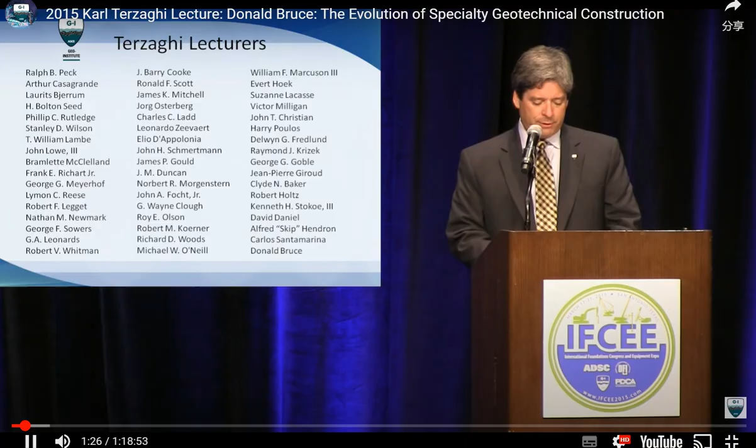I'm proud to be the one to introduce this year's Terzaghi lecturer, Dr. Donald Bruce. Dr. Bruce has spent his career in the practice of geotechnical engineering and construction, and has produced significant contributions to the profession that have helped advance our industry. I can think of no better forum for this speaker or this topic than here at IFCEE, where we have such a cross-section of the geotechnical engineering and construction community. Dr. Bruce's leadership in technologies such as anchors, micropiles, grouting, deep mixing methods, and diaphragm walls has shaped the way geotechnical engineers solve practical problems.

He completed his formal education at Aberdeen University and then spent about a decade with Colcrete Limited, rising to a seat on their main board. In 1986, he joined Nicholson Construction in Pittsburgh, Pennsylvania, as their technical director. Since the late 90s, he has maintained a technical consultancy, Geosystems LP, supporting consultants and contractors around the world. Throughout this time, he has been actively engaged in numerous professional and trade organizations and code writing bodies. In fact, he may be one of the most prolific practitioner writers in our industry. With nearly 300 publications to his credit, he has shared his experience throughout his career.

He was recognized with the Martin S. Kapp Award and the Wallace Hayward Baker Award. And I think it is safe to say that without his efforts to expand our understanding of many geotechnical construction technologies, our industry would look very different. I'm happy to say that Dr. Bruce has been one of my mentors for many years, helping me navigate many technical and some not so technical challenges of my profession, or of the profession. So without further delay, Dr. Bruce, would you join me up here at the podium?

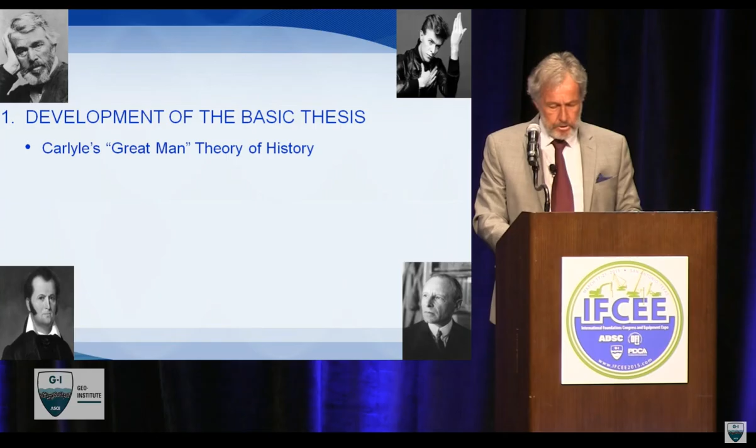There's a wonderful continuity in this little argument I'm going to present here. Professor Dick Goodman, who many of you know, is widely regarded as the father of modern rock mechanics. He remains a gifted engineer and a thespian. Arguably, his finest and most enduring work is his 1998 book, Karl Terzaghi, The Engineer as Artist. Professor Goodman dedicated this book, in turn, to Ralph Peck, whom he called a courageous, strong, honest human being whose teaching, writing, speaking, and practice of civil engineering continue to light the way.

Dr. Peck, in turn, is quoted in the book as follows: "Although I knew Terzaghi well, because he'd worked for and with him for almost 30 years, I did not fully appreciate the personal struggles of the genius of the man until I read Goodman's manuscript. Goodman has caught the essence of the man." Dr. Peck gave the first Terzaghi lecture in 1963.

Terzaghi, Goodman, Peck, not to mention others of such status, such as Arthur Casagrande and Mike Duncan, the Terzaghi Award winner 1991. These are great men in geotechnical history, bringing enlightenment, inspiration, and example to all of us that they touched.

Now, each of these men, as you probably know, spent as much time in the field as they did in the classroom. And each was intimately acquainted with construction, means, methods, and materials. They solved in a practical way otherwise intractable construction problems and had the gift of communicating simply and clearly the logic and details of their solutions. None of these men, nevertheless, was a contractor. I guess everybody cannot be perfect.

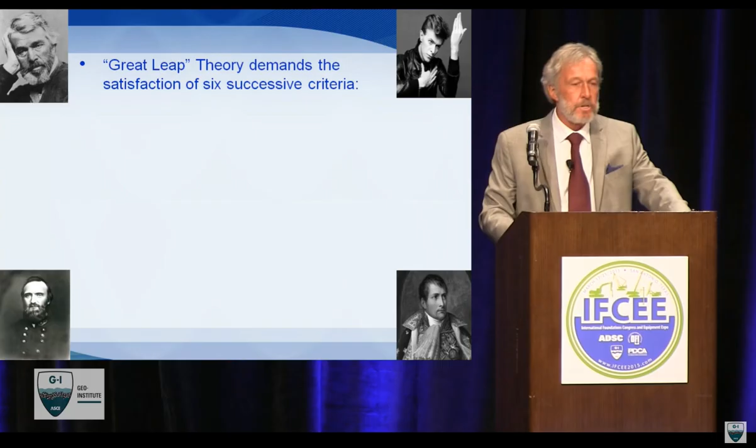So, to constitute a great leap, I propose that 6 successive criteria need to be satisfied. Please try and remember these as we go through the rest of the afternoon, because each of the 3 techniques I'm going to talk about will demonstrate how great leap theory is satisfied by looking at each of these successive steps.

Criterion 1: the project, group of projects, or application must be of exceptional and/or unprecedented scope, complexity, and construction risk.

Criterion 2: a specialty contractor must exist who has the ingenuity and resources to devise the solution, and there must be a manufacturer that he can work with that can provide the equipment needed to implement the solution.

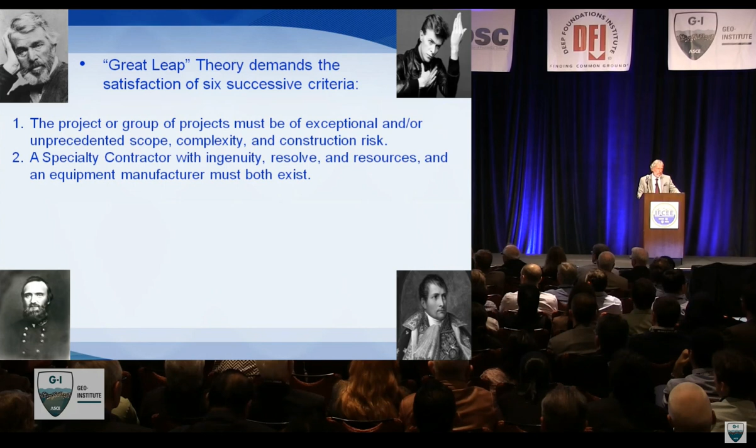Number 3, on the other side: there must be a responsible individual and/or agency on the project owner's side who is prepared to take the perceived risk of deploying a new technology or technique, and who already knows the answer to the question, so where has this been used before? There's got to be somebody on the engineer's or owner's side that is willing to take that risk.

Criterion 4: the projects we talk about have got to be successful. This is clear. We cannot have a recurrence of the situation where the operation was a great success but the patient died. So it has to be a good job or series of jobs.

Number 5, to qualify for the Great Leap: details of this project must have been published widely in the scientific technical press, and not just or only as wonderful articles in the trade magazines, no matter how beautiful and informative these may be.

And then number 6: within a few years, there must be some formal codification or other influence over construction processes to assure the legacy of the Great Leap and to guide and tutor future exploitations, the dubious defense of patents notwithstanding. In our field, such recognition typically comes through the publications of a federal agency, such as the U.S. Army Corps of Engineers, Bureau of Reclamation, Federal Highways, and so on; a professional society such as the Geo Institute; or the efforts of trade associations such as DFI, ADSC, or PTI.

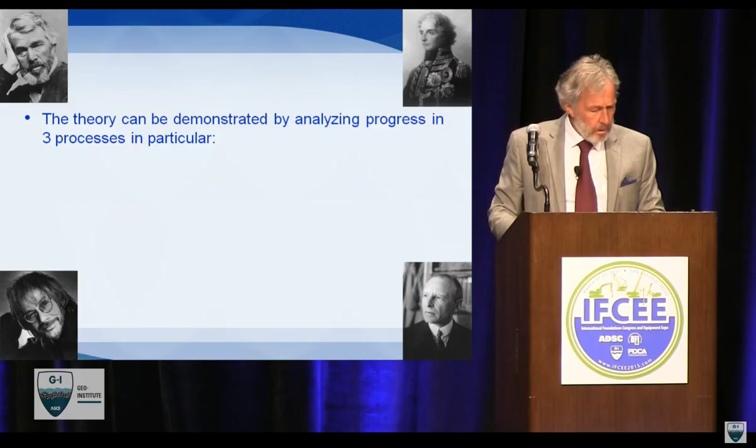So the 3 that I intend to talk about, and those of you who know me will not be surprised: grout curtains in rock for big dams, cut-off walls for dams, and deep mixing methods.

Again, I apologize that your own particular favorite subject has not been covered, but I would encourage you, if you are moved, why don't you write a similar paper about the great leaps that have influenced your particular technology as well. Now, I have to come with a government health warning here.

In the course of the next half hour or so, I'm going to be mentioning a lot of companies, contractors and consultants especially, with whom I have worked over the years and who are integral to the Great Leap theory, i.e. Criterion 2. So I'm not trying to promote them or endorse them or say that they're the biggest and the best. I'm simply making a historical statement of fact. So please don't not buy me a drink in the bar later if I don't mention your company.

Okay, so with that in mind, then we go to the fun part of the lecture. This is where we're just going to make it up as we go along. And I have my board in front of me, so I don't have to turn sideways. At a time like this, especially before dinner at the beginning of a conference like this, I don't think it's satisfactory that you just be educated. I think it's important that you be entertained as well. So those of you who have come here with your notebooks ready for fourth order differential equations will be sadly disappointed. Those of you who would really like to see, thank you very much for that.

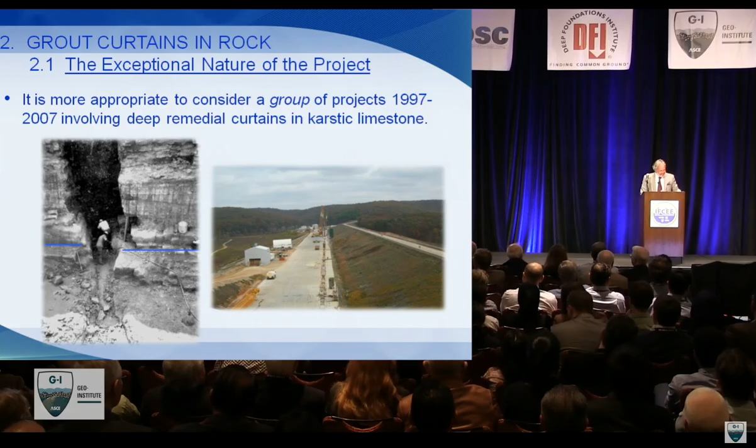Right with you, brother. And those of you who are here maybe to look at some cool bits of equipment, nice jobs, some of which you may have been involved with, that's the kind of talk we're going to have for the next half hour or so.

So, grout curtains in rock. Remember, we have six criteria that define the Great Leap, and the first is that the project's got to be exceptional. There was a group of projects that kick-started the Great Leap in curtains in rock, from 1997 through to 2007, involving deep remedial curtains in karstic limestone.

Now, for those who haven't had the pleasure of working in karstic limestone, a few words. Limestone has joints in it. Over the years, these joints erode and create caves. Karst is a word in German associated with cave.

Many of our dams in and around the Mississippi Valley sit on karstic limestone. Most of the big karstic features, shown on the left-hand side here, are clay-filled. Over time, as the reservoir works on these features, if they haven't been previously treated, this material will erode and cause a dam safety incident. And we're not just talking about wee dams or little dams.

We're talking about gigantic, big dams. That's why we're the conference on large dams, not a conference on little dams. We have dams that are hundreds of feet high and thousands of feet long.

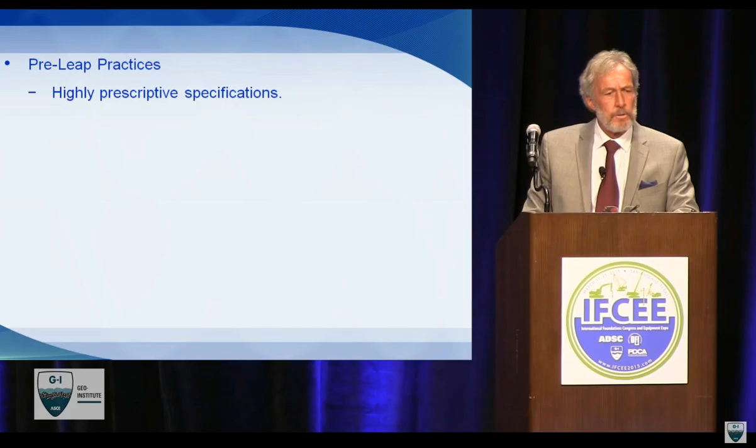So in drilling and grouting, the pre-leap practices would have been the state of affairs from maybe 1900 through to about 1985. Very prescriptive specifications, a complete absence of rational design and acceptance processes, and a widespread use of rules of thumb for design and execution. From a technical point of view, these were the features that marked the kind of work done until quite recently.

And all of these, incidentally, are bad things, okay? So even if you don't know about drilling and grouting, just assume that this is just not good news at all. Especially the last one.

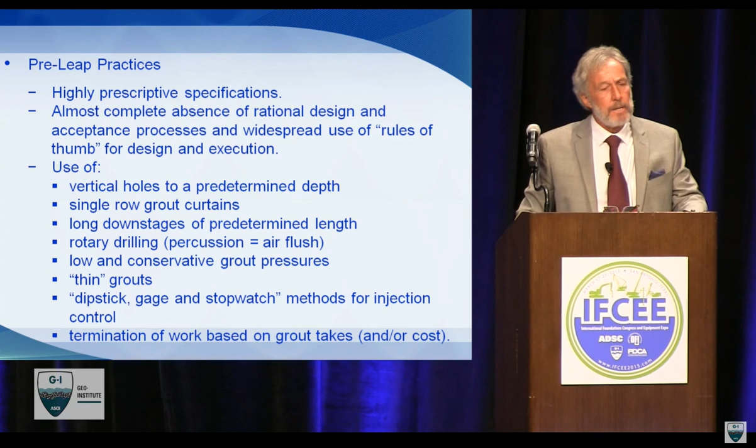Many of our dams that we work on, for example in the Tennessee Valley Authority back in the day, were unsuccessful because they were grouted not to a residual Lugeon value, but to a residual dollar value. So basically you stopped when the money ran out. And when you grout in karst, you've really got to know what you're doing.

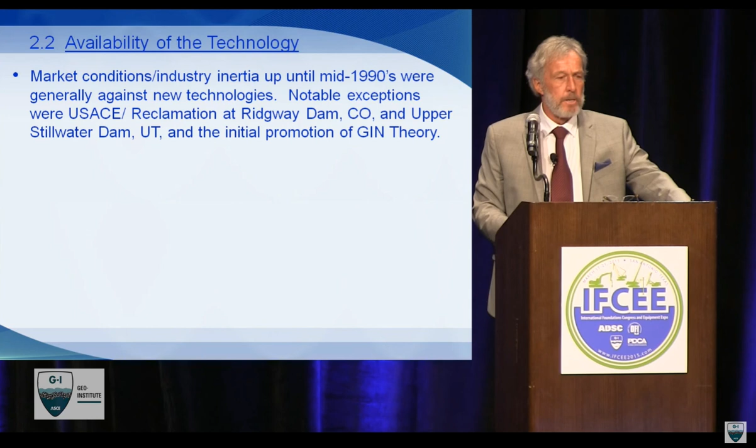Back in the day, there was the initial promotion of GIN theory by Lombardi and Professor Deere. Not much happening. Then the leap occurred.

This is where we have our first confirmation that there's a technology available to solve these problems. It was basically an association of a contractor, Advanced, and a consultant, Gannett Fleming. They got it together and introduced simultaneously numerous technical developments as an integrated package, from the design side right through to the implementation side.

I think, quite frankly, they hit the sweet spot in the market, because the Corps especially was moving towards best value as opposed to low bid contracting, and more performance-based specifications, therefore more ability for the contractor to actually give what was in his mind, not just his arms and legs. He was able to bring his head to the game as well. You can only do that if you have performance-based specifications.

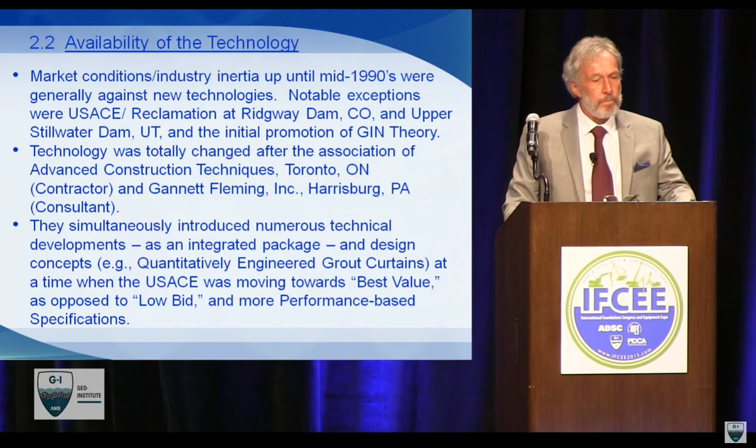So all these improvements come along. Design improvements: there's no such thing, folks, as a one-row grout curtain. It's an absolute fallacy, like the check is in the mail. Inclined holes, not vertical holes. The depth of the curtain being dictated by the geology, not by a rule of thumb, and various other things as well.

And then once we had built the curtain, verifying the residual permeability of the curtain by doing in situ water tests. So instead of grouting to the dollar or the sack of cement, we're grouting to the Lugeon value, or the centimeter per second.

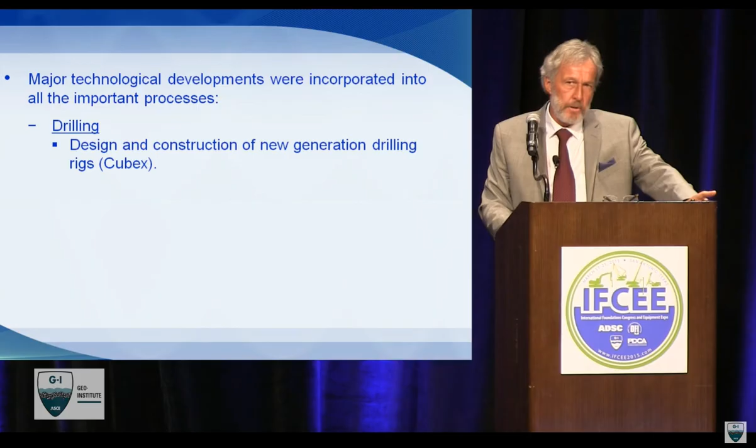So that's on the design side, that's what the Gannett Fleming team brought. Advanced, what did they do? On the drilling side, they commissioned and had built for them a new generation of drilling rigs specifically targeted for the deep grout curtain market, the Cubex company from Winnipeg in Canada.

At the same time, we were looking at ways to drill through our existing dams without causing damage. So we had the sonic drilling first proposed by ProSonic and Boart Longyear, and then the double head dry duplex system for overburden drilling as developed by Advanced themselves.

Increasingly, from McCook Reservoir in 2003 onwards, the water-powered down-the-hole hammer, produced by Wassara from Sweden. This is absolutely the bee's knees in terms of rock drilling, combining rotary percussion, i.e. speed, and water for flush and cleanliness of the fissures. We don't drill with air when we're trying to grout fissures.

And then, of course, the routine use of automated MWD, measurement while drilling techniques, such as offered by Jean Lutz and many others. Other companies, such as Bauer and so on, have their own drilling performance measurement technique, but fundamentally Lutz came with the first one, and others followed and improved upon it.

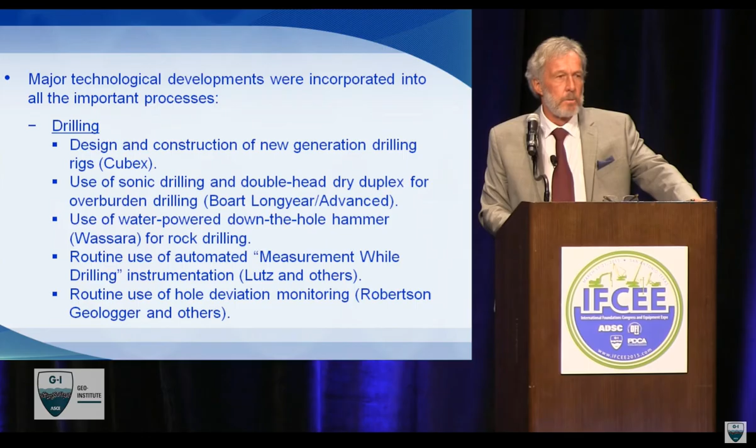And then we have another really interesting thing that's happened over the years: the systematic use of borehole deviation monitoring, specifically using the Robertson geologger and other devices as well. It's really quite important to know where these holes really are 400 feet down.

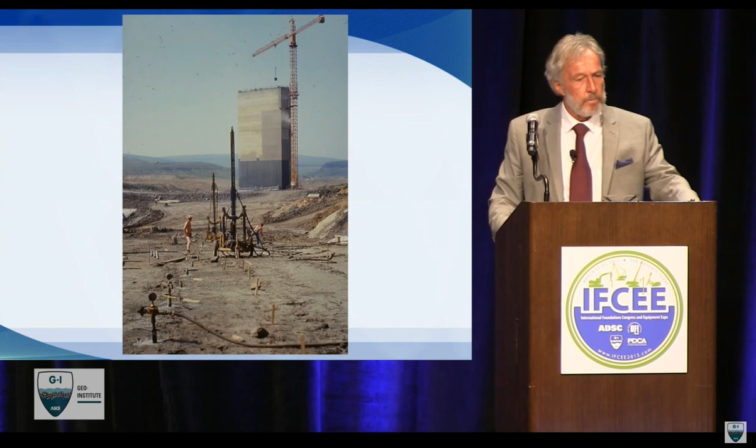Then, of course, there were other staggering breakthroughs in drilling technology. I was really trying to get a photograph of the guy in green underpants since it's St. Patrick's Day, but unfortunately we'll just have to do with the blue. But he's got his hard hat on, so this is good. And then for those of you who are really into health and safety, this is rather good. Here we have this gentleman at Tarbela Dam sitting on top of the drill head, helping to unscrew the rods as we're changing. So yeah, it's funny, but it's not to be done.

So here's then what we do now. This is a photograph of one of the Cubex rigs that was used by Advanced and Gannett Fleming at Wolf Creek. Many of the other contractors in the room, Baker and Nicholson and so on, have these wonderful machines now, and they really have set the standard.

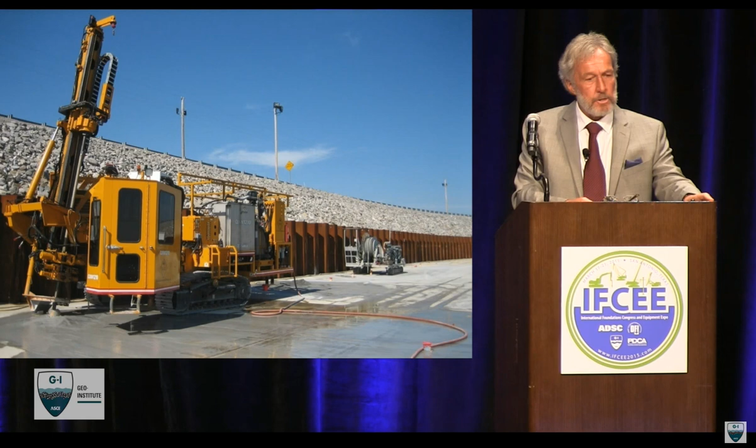Climate-controlled, automatic drill rig parameters, automatic rod handling and changing facilities, tremendously adept, huge productivity improvements over the last. And here's our friend Mark, looking at the business end of the double head dry duplex system at Clearwater Dam.

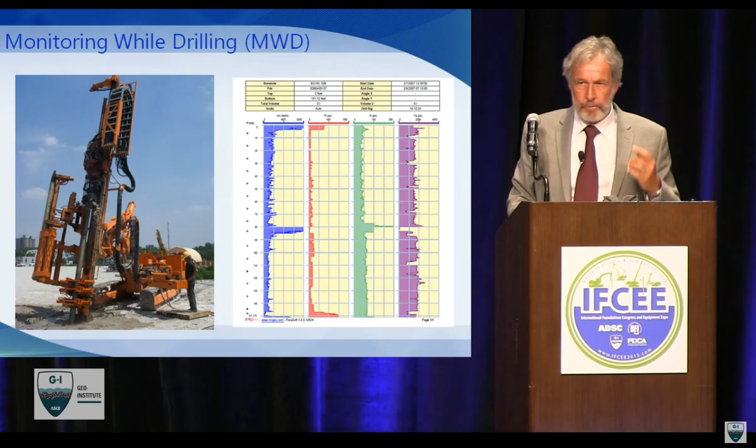Monitoring while drilling: these Jean Lutz systems monitor everything that happens during the drilling of a hole. So you don't really have to drill a site investigation hole adjacent to work out the strata. If you were faced with this log, you'd look at these different colors, look at the different parameters they represent, and convince yourself there's something funny going on, say 60 feet beneath the surface. So every hole we drill on a dam or construction site, even with destructive drilling methods, is a source of information on the ground. It's not just a means of getting a hole in the ground, it's an investigation and verification of the ground as we go. Often, especially as contractors, we miss that because we're so busy getting footage, we forget what the footage is telling us about what the ground is doing.

Here's this lovely instrument, the Robertson Geologger. Basically it's an optical television machine that goes down the hole and gives you the equivalent of a flat core. So instead of drilling a core with a different drilling rig, taking it to the surface to have a look at it, you now have an optical, three-dimensional appreciation of the in situ conditions in that hole. If you're really clever and can manipulate this, you can work out the orientation of defects and so on, which is very difficult with conventional coring.

Injection systems - what else did Advance bring to the table? Well, they brought grout buggies. You know, so what? But I'll show you in a minute. Automatic grout mixing, weatherproofed enclosures.

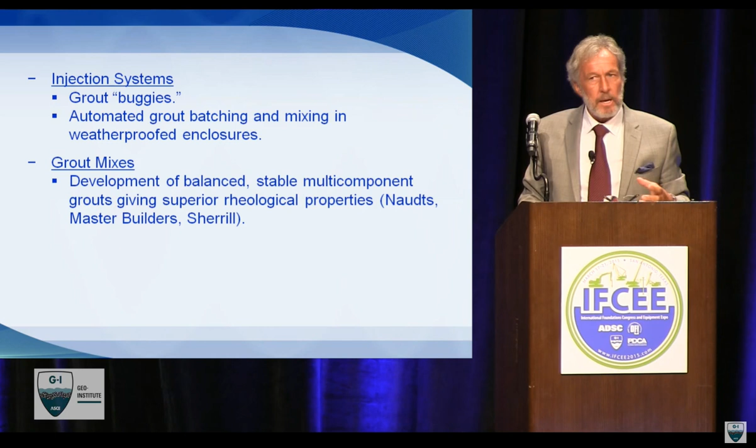Grout mixes - all grout mixes are not the same. My old colleague Alex Naudts in Canada was the first person in North America to introduce the balanced, stable, multi-component grouts. These give superior rheological as well as stability properties. They're not thick mixes like some people think we have to inject at huge high pressures - it's not the case. We're getting the best of all worlds rheologically, from a hydration point of view and so on, by having a whole series of components, just like making a cake. Depending on who's coming for dinner, you have a little bit of this and a little bit of that to give you the desired properties.

And then we have this whole issue of the pressure filtration coefficient. DePaoli and I wrote a paper back in 1992 that nobody read, which is not surprising, except for Alex Naudts - he picked the bones of that, and he fully understood what we were talking about. I'll show you what I mean in a second.

So here's back in the black and white days. There's the fellow standing over, in fact it's a concrete mixer, feeding an agitating drum, feeding the pump, and he's got his spaghetti of wires everywhere and hoses everywhere. That's typical of the practices right up probably in this country till the early 90s.

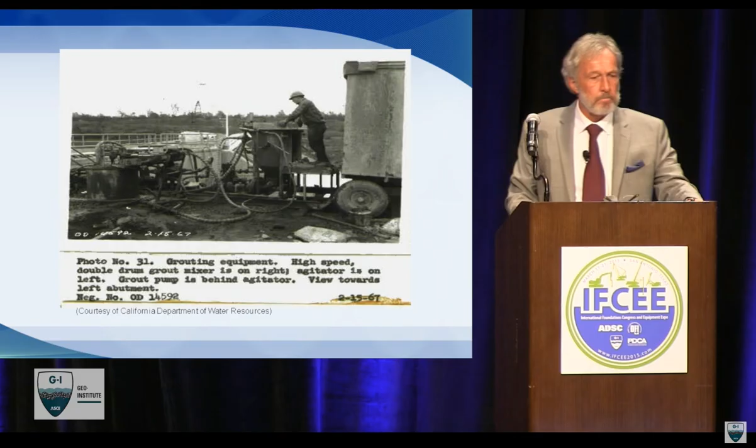Now, this is as complex as my talk gets today, but it's fundamental. This basically explains the whole background to balanced, stable grouts. Many of you have seen this slide before, but I don't know if many really understand what's going on. It took me a long time to work it out as well.

Along the bottom you've got some measure of thickness - very thin on the left, thick grouts on the right. On the vertical axis there is a measure of stability of the grout under pressure, meaning that when you start injecting it into a fissure in situ, what is the measure of that grout to hold itself together, as opposed to just pushing the water out of the mix and smearing off the borehole wall? That's called pressure filtration.

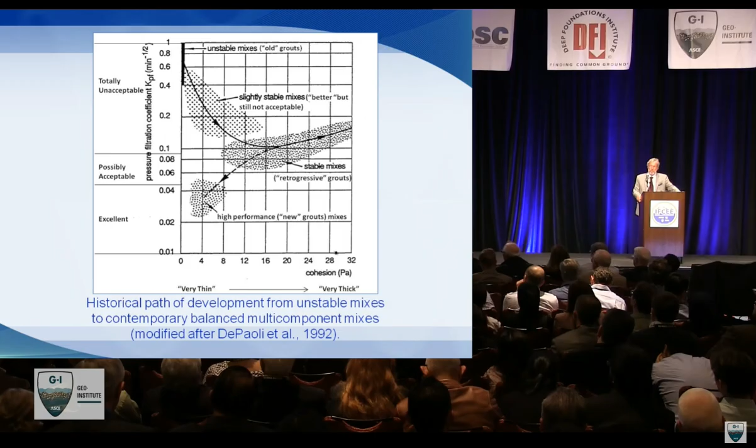It's terribly important. Now, computer control and analysis. Those of you who know me would understand that what I know about computers you could write on the back of a postage stamp with a big felt tip pen. But as a user of these technologies, I'm all for it.

One of the first techniques that was developed after Hayward Baker's initial attempts was called CAGES, Computer-Aided Grouting and Evaluation System. This was developed by ECO and Alex Naudts up in Toronto. Soon, as a result of our work at Penn Forest Dam with Gannett Fleming, they developed a superior system, or a different system, called IntelliGrout.

Basically this was recording, analyzing, controlling, and displaying all injection parameters in real time. This allowed the apparent Lugeon theory, which allows us to bring holes to proper refusal, to be adopted. Again, Alex was behind that. We used IntelliGrout in real time in order to demonstrate that we could grout to a Lugeon or half a Lugeon via systematic use of multi-pressure Lugeon testing.

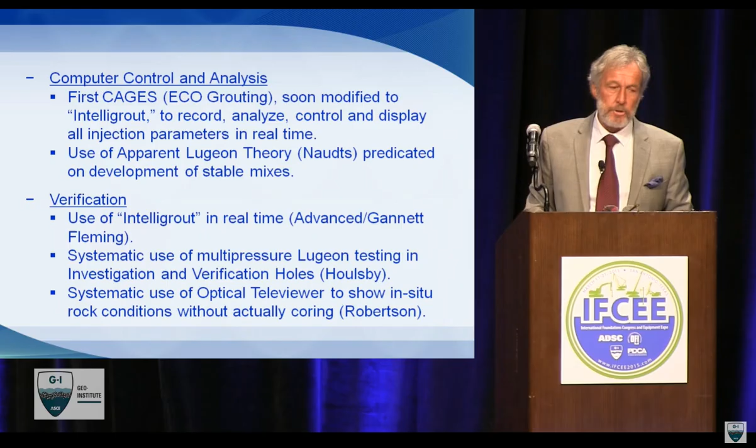And then the optical televiewer to show the in-situ rock conditions in the curtain without having to core. So we save the whole expense of a separate rotary coring machine. So again, just some slides to accelerate us through this process here. But here's dipstick, gauge, and stopwatch technique.

And so as a grouting engineer, you're sitting watching the TV and you're guiding the injection of any one stage to ensure that the residual apparent Lugeon approaches zero. That means there's no take in the hole.

So this is how we do it now with apparent Lugeon theory. Now there are other ways, like the GIN method and one or two other things that Golder have introduced as well, but in essence, most of the superior work done in the US runs off apparent Lugeon theory.

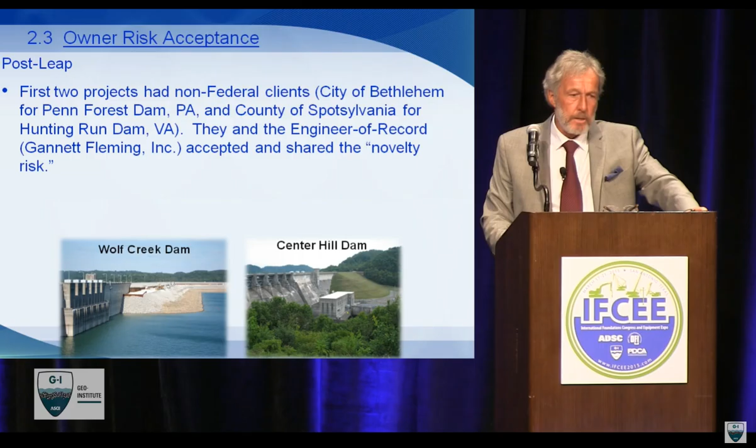So the third criterion, what did the owner think when all this came up? Well, the first two projects done with these great leaps were both non-federal jobs: Penn Forest Dam, city of Bethlehem, and Hunting Run Dam, county of Spotsylvania. They and the engineer of record accepted and shared the novelty risk.

There had to be somebody who would dive in the pool first. And then equally later, our colleagues in the Corps accepted the novelty risk, particularly some districts - Louisville, Little Rock, Nashville, Chicago - backed up by headquarters in DC. Now the one thing you see in common with all these districts, other than DC, is basically they all sit on karstic limestone. So they had the problem, they had to solve it. But they showed great courage and great resolve in accepting these new methods.

So were they acceptable? Did we have success? Well, sure we did - that's why I'm going to talk about them. And so we grouted these to very tight residual permeabilities, 1 to 5 Lugeons depending on the target. Grout curtains were used systematically as part of what we now call composite walls, where we do drilling and grouting to begin with, and then we follow up with a diaphragm wall between the two grout curtain rows, in order to prevent long-term degradation due to the movement of the karstic material.

Technical publications, the fifth criterion. Have we published anything about these things? Well, you bet. We've had a couple of really good conferences, New Orleans in '03 and '12. The annual conferences of the Dam Safety Association and USSD have tons of papers on this kind of work. There's a couple of textbooks - blatant advertising there. And every year we have the annual short course on grouting at the Colorado School of Mines, at which many of you in this room systematically teach.

And of course, presentations at the Corps' infrastructure conferences on an 18-month cycle. As I say, we've mentioned a couple of contractors in particular, but this is now the standard of care of superior grouting in North America, and it's attracting attention on a worldwide basis.

Have we codified it? Yes. Those of you interested in this work will be glad to know that Gannett Fleming, under contract to the Corps, have now completed the revised grouting technology manual, which has been issued as of July 31 last year. So it's a tremendous piece of work, and grouters all over the world, just like Sam here, are undoubtedly tickled pink to have that on their bedside table.

Now, the second group of technologies that I want to talk about are cut-off walls for dams. And here's a rather good photograph of Wolf Creek Dam in Kentucky, and a little bit of information about it. But you can see right away the problem that's incipient in the foundation.

Here there was a design flaw, in that having cleaned this foundation, having taken the clay out of these features, the Corps then replaced that material with clay, which was not a terribly good idea. This dam, Wolf Creek, was designed in the 1930s and started work just before the US joined the war, and then it was suspended. So by the time it was finished in 1952, you were basically looking at a design that was 20 years old, and in that period a lot of things had happened.

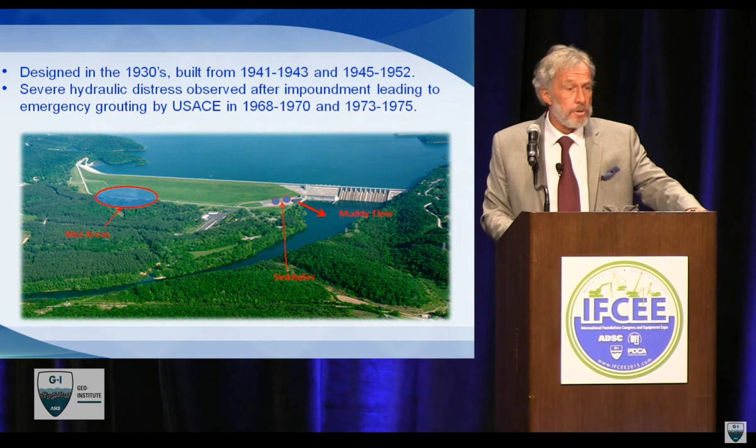So this is not good when you have a dam that is holding back Lake Cumberland and is protecting Tennessee. The primary failure mode, of course, was related to the erosion and the piping of the soft material.

and the clay backfill. So back in 1975, the ICOS Corporation, under the leadership of Arturo Ressi, won an international competition to build the first ever cutoff wall in an active dam anywhere in the world. And this is a photograph from the 75 effort.

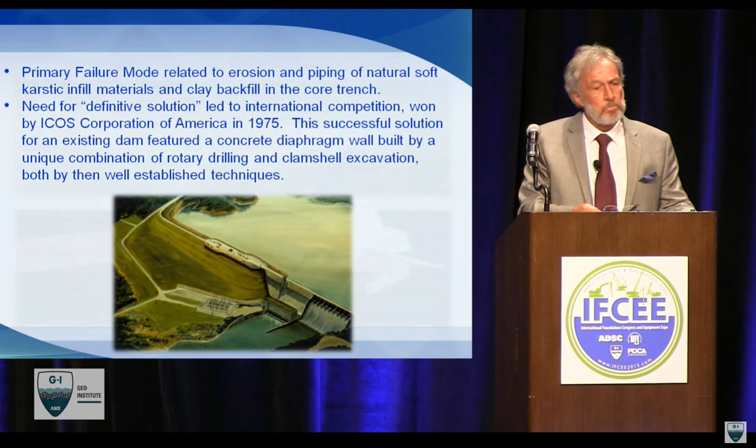And this is exactly what they did. There's the ICOS wall in purple. In fact, they had a wall running through the axis of the dam, and then another smaller wall down in the switchyard. But the Corps had actually saved the day in Kentucky in 1968 through 75 by doing all that grouting to repair the damage before the wall was built. So that was how the original wall was built.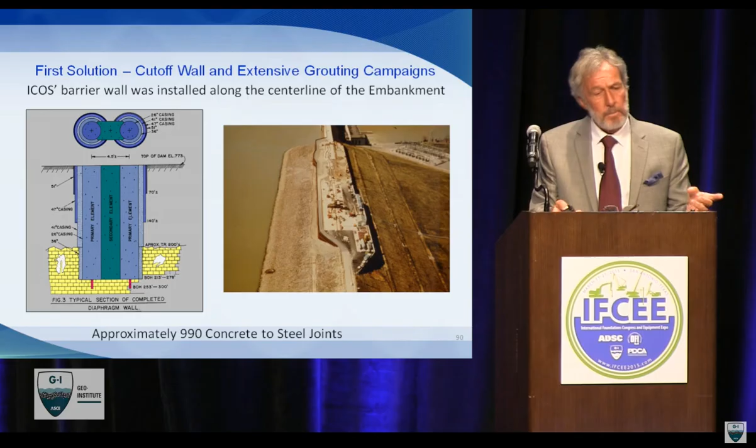It basically used rotary drilling techniques, not secant piles, but large diameter piles, and then that green bit being taken out by a clamshell guided by the adjacent secant piles, by the adjacent large diameter cased piles. So it was a tremendous achievement that was done.

And these are photographs from the 70s showing the equipment, showing these cased piles, and then showing the very sophisticated deviation monitoring device on the right-hand side. But it worked, and they built the wall 24 inches thick, thousands of feet long, 280 feet deep, 97 million back in the 70s. So it was an absolutely spectacular project.

However, Dr. Peck was on the original board of consultants. Many of you will know this, as was Mike Duncan. And he thought at the time that the wall was neither deep enough nor long enough. Was Dr. Peck ever wrong?

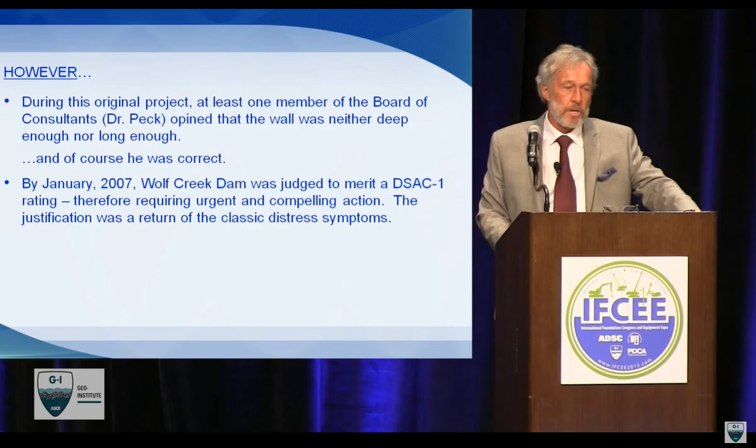And by January 2007, Wolf Creek was judged to merit what we call a DSAC 1 rating, i.e. get something done right now. And there was a justification because of the return to the classic distress indicators.

Now, for those of you who don't know about dams and distress in dams and so on, lots of things can happen. You can get sinkholes, you get wet areas, you get seepage, you get artesian conditions in the piezometers, you get cracks in the roadway, you get settlement. And all these things were in the red zone as far as Wolf Creek in late 2006 and early 2007.

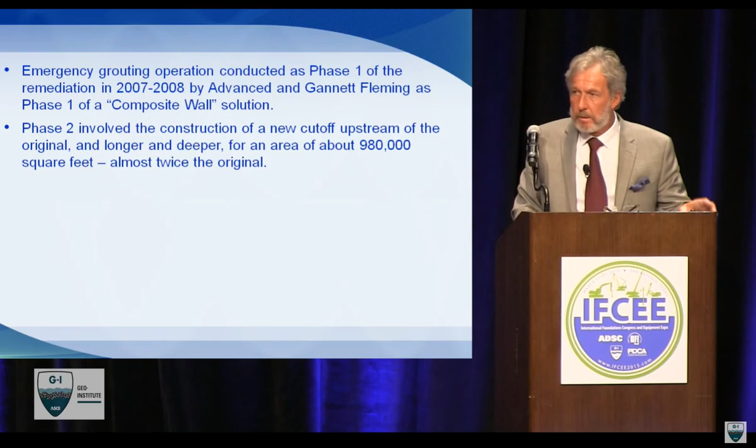When we caught it, there was a phase 1, conducted by Advanced and Gannett Fleming, an emergency grouting operation, but the intention of the Corps was always to build another diaphragm wall. Longer, deeper, better, more expensive.

So the Corps, again very prescient, released the work on a performance-based spec, emphasizing dam safety in every process of the work, as well as urgency. And this is a classic example of one of these great leaps in business.

Now, this problem attracted international interest. Our colleagues in Germany and France and Italy were equally as interested as were our US companies. And it was obvious to everybody that what had been used and done back in the 1970s was not going to work the second time round. And so a lot of new things had to be done.

So this was the solution conceived simplistically by the Corps of Engineers. Here's a cross-section of the dam sitting on soil. That was the other thing that we didn't do back in the 50s - we didn't strip some of the soil. And then the karstic limestone - these browny yellow things are big karstic features. So here's the wall, the existing wall built by ICOS in the 70s.

And this is what the Corps wanted to do this time: a deep grout curtain.

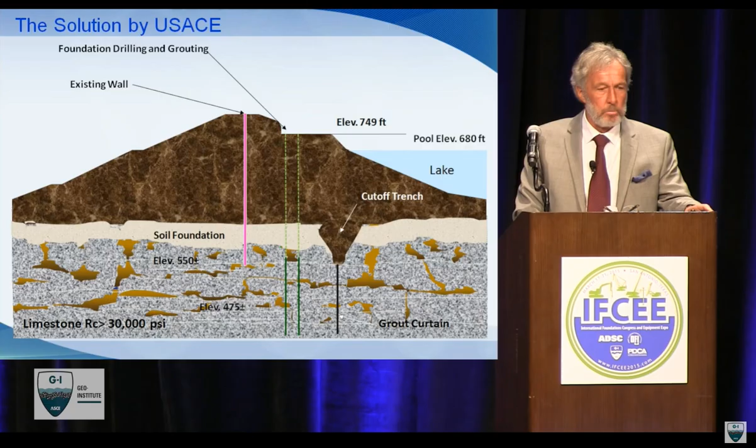And then between the two lines of the grout curtain, a deep diaphragm wall. You can see it was built on the upstream side to save quantity, and it would completely negate the purpose of the first wall. So that was what was planned.

Just to summarize again: there's the wet areas, the muddy flows, the sinkholes, the existing wall done by ICOS, and then here's the new wall that is upstream, longer, and deeper. I'll come to the protagonists in a minute.

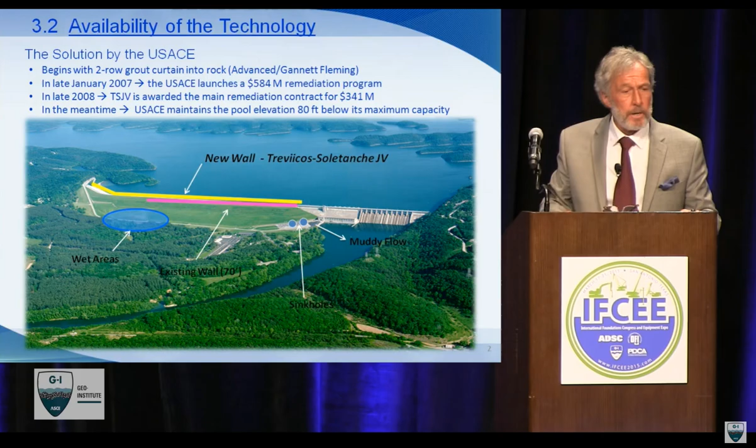So who are they? As you know, the job was done by the Treviicos-Soletanche joint venture. Who are Trevi? Well, they had acquired the ICOS company in 1997, and so they had the mentality of what had gone on at Wolf Creek the first time round. They also picked up Rodio, a very fine Italian company, at the same time.

They had very good and similar experience at Walter F. George Dam in Alabama. We'd also worked, as Nicholson, in joint venture with them at Beaver Dam in Arkansas, building a secant pile cutoff. Because of their other work, they also had particular experience in directional drilling and water-powered down-the-hole hammers.

Soletanche - so who are Soletanche? One of the great companies, a pre-war French subsidiary of Rodio. During the war, they were French, therefore they won; Rodio were Italian, and unfortunately they lost. So after the war, Soletanche basically became the dominant player in the whole Soletanche-Rodio empire. Then, of course, Soletanche combined with Bachy some years ago.

But the key thing that Soletanche brought to the table was that they had patented in 1972 the hydrofraise, or hydromill - with apologies to my French friends, also known as a cutter or a mill, and subsequently produced by competitors.

Now, what's so special about a hydromill? Well, this is literally the bee's knees. This is a big frame that you aim at the ground - you turn on the wheels, you turn on the pump, and this machine chews itself into the ground, creating a wonderful, straight, regular slot. If you do that enough times, you create a diaphragm wall. It's very simple - that's as complicated as it gets today on the hydromill.

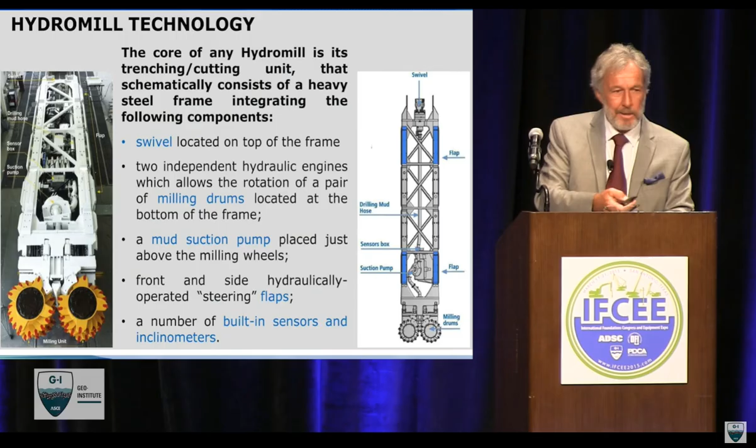According to information that Tom Richards gave me, it was initially deployed in Paris in 1973, and was used for the first time by Soletanche on a dam for remedial purposes at St. Stephen Dam, South Carolina, in 1984. So Soletanche had a very long track record working on dams in the US.

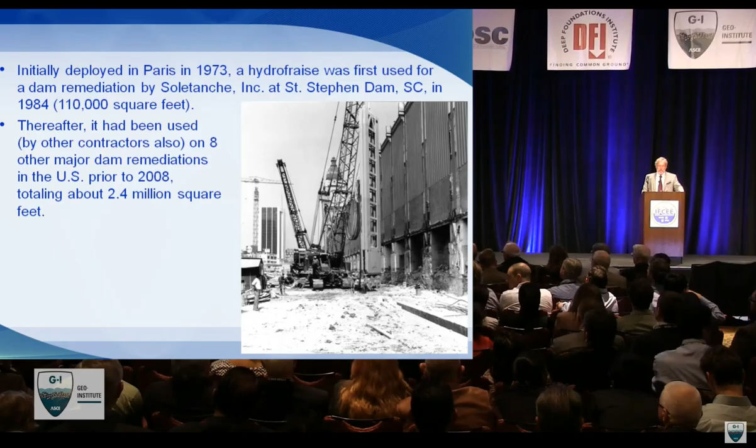So right up until 2008, a pretty steady 1 or 2 dams a year in the US - many of these projects done by Trevi's partner at Wolf Creek. The deepest wall constructed before Wolf Creek was at Mud Mountain Dam, over 400 feet deep. Most recently we hear from our friends in Italy that they've taken this to 800 feet at Gualdo as a test, achieving 0.13% verticality.

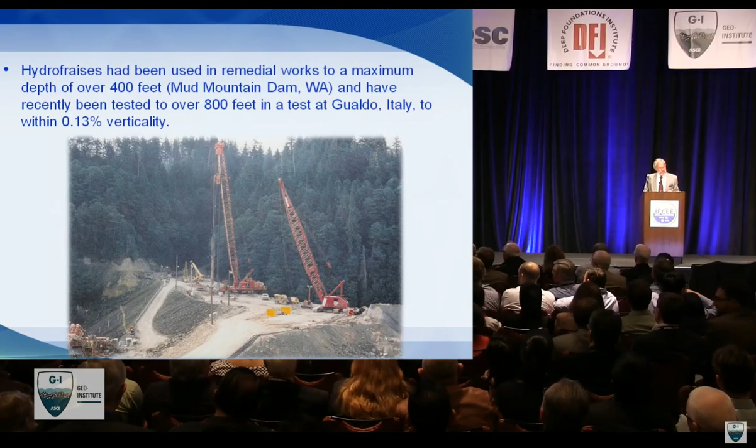So basically the hydromill allows you to drill very deep into hard material and guide it to a fraction of a degree of verticality - it's an extraordinary machine. I always used to describe it like a Formula One racing car: when it worked, it went very fast, but it would spend a lot of time in the pits. More recently, the hydrofraises have become much more reliable from a technological point of view.

So, obviously, Trevi and Soletanche get together to do Wolf Creek 2. And how do we design that? Well, first of all, we're going to build a 6-foot wide disposable diaphragm wall through the dam itself to protect the dam from the effects of the rotary drilling underneath. It was a very clever concept, and this is in fact what was done.

So here's a little animation just to summarize better what I just said to you. Here we've got the embankment, the poor stuff, and then the rock.

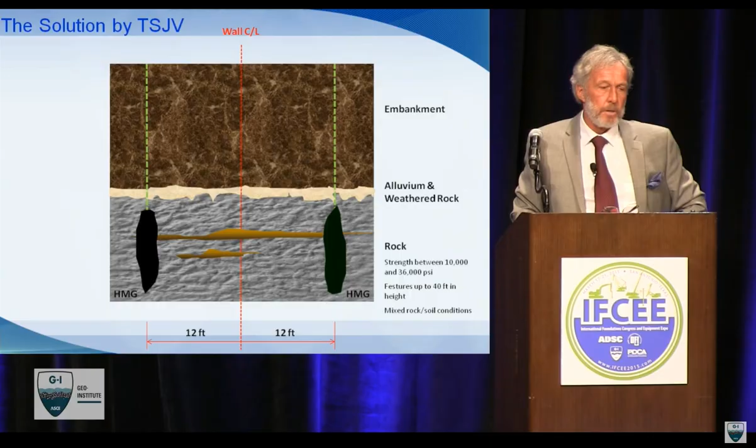Here's the center line of the wall. First thing to do is to do the drilling and grouting of the rock on either side. Remember, this is a composite wall. So what we're trying to do is to prepare the ground for the diaphragm wall.

Then the interesting thing that the joint venture did was elect to do an LMG operation to treat specifically the interface between the dam and the rock, to further protect the ground for the installation of this 6-foot wide diaphragm wall, which was taken down just to the contact.

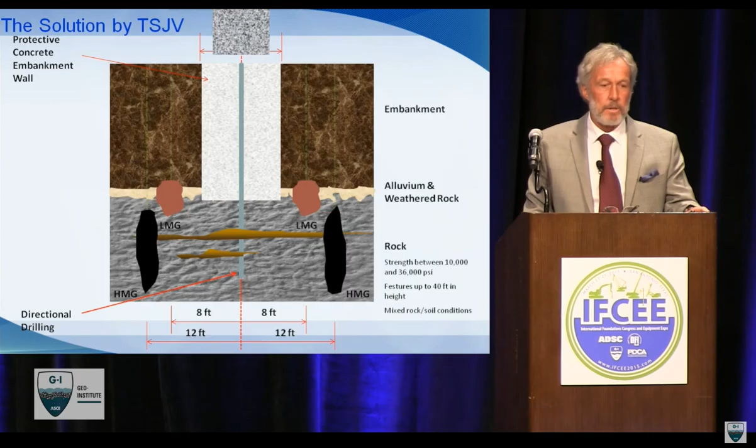Having protected the dam, the next stage was to build the cutoff in rock. This was achieved with directional drilling, followed by 50-inch holes at 30-inch centers to create a secant wall in the rock under the dam, protected by the big diaphragm wall. Hayward Baker were engaged to do that LMG work.

They also completed the HMG work that had been begun by Advanced and Gannett Fleming. Many of you will have seen these slides already, but there was a lot of iron, as the contractors say, on this job at any one time.

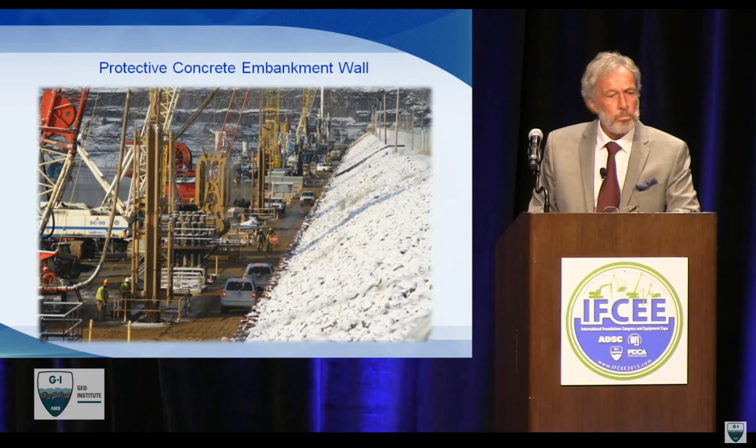Here's the big 6-foot wall being constructed in the foreground. Then you can see the directional drilling, the Soilmec machines in there, controlled to within 0.1% accuracy at depths of almost 300 feet.

Then the Wirth pile top machines installing the secant piles through the wall and into the bedrock to create the cutoff. So here you have 50-inch piles at 31 or 35-inch centers. Maximum depth 277 feet. Okay, so that was the contractor's side.

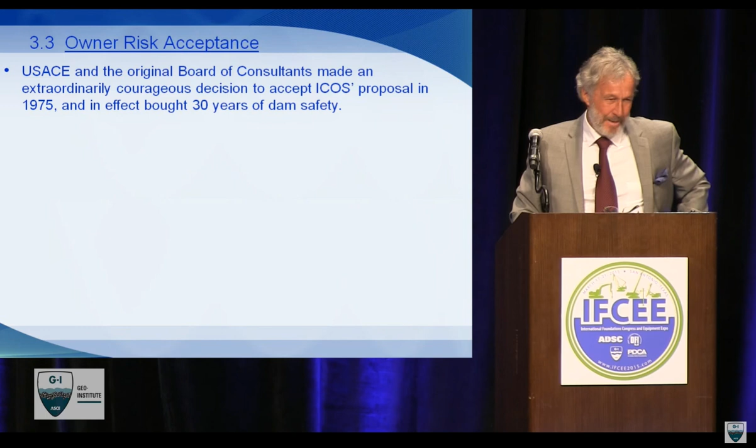Criterion 3: if you were the owner, would you have accepted it? I would have been scared witless, quite frankly. But let's remember the Corps was very brave back in 1975, and its board of consultants were very brave. Effectively, although flawed, that original work bought 30 years of dam safety to the Corps of Engineers. And I think the Corps and the 2007 board were no less courageous in designing the second wall, given their superior knowledge as to how fragile that dam really was. It was just on the edge.

Now, the Corps didn't go into this blindly, and they put a lot of risk mitigation measures together. They awarded this job on the basis of best value as opposed to low bid, with a focus on the technical proposal - very important.

First, before we could move into the production phase, we had to do technique demonstration areas, full-scale tests on site to show that we could do the work and do it safely. Very high levels of QA/QC - the contractor's side and the Corps side each had over 30 people full-time on QA/QC every day.

Implementation of a very intense instrumentation monitoring plan made sure that the dam was monitored during its penetration and during its remediation. And then there was actually very effective partnering - often something people turn their noses up at, but partnering was essential to the success at Wolf Creek. Not only did the two sides get together, but the Corps had its own board of consultants, and the contractor also appointed its own equivalent board of consultants.

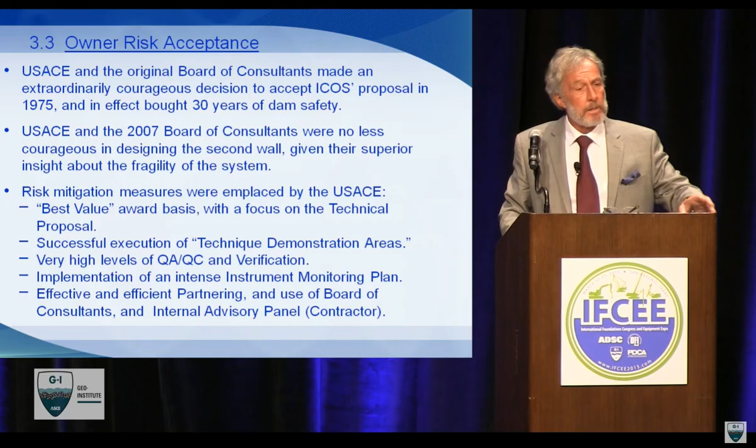So they got together at different levels, especially in the early days when things were maybe a little bit hairy from different points of view. There would be these massive technical meetings at which many things were thrashed out over a couple of days. To the great credit of the contractor and the Corps, these things went very well.

So, as you all know, it was a success. Only one of 1,197 piles went outside the verticality criterion. Everything else was satisfied, without question. The job was finished early, with no dam safety incidents.

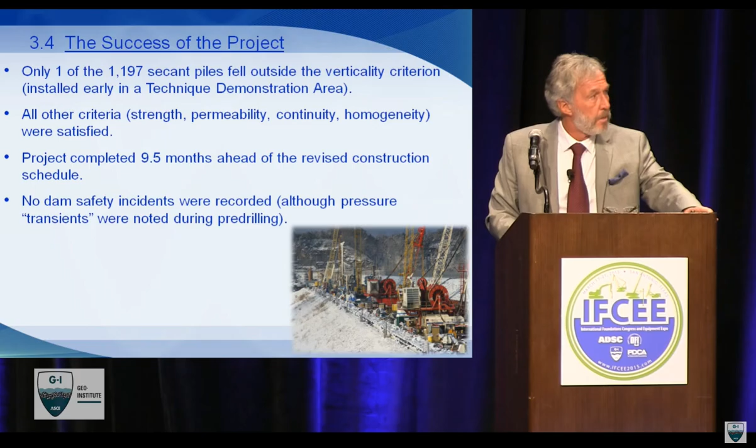But I will say that when you drill with the water hammer, when you do grout with the HMGs, you will have transient pressure spikes in the piezometers. These happen. But as long as they're transient, your dam, which is 300 feet high and 6,000 feet long, is not going to feel them. We're not going to explode the dam or hydrofracture it, like some people think who don't fully understand what we're doing. Since then, all the indications on the job are that the dam and the foundation are functioning very efficiently. It's been a beautiful and extremely well monitored project.

So, have we published? Well, you bet. There have been at least 12 technical publications so far in the usual suspect conferences.

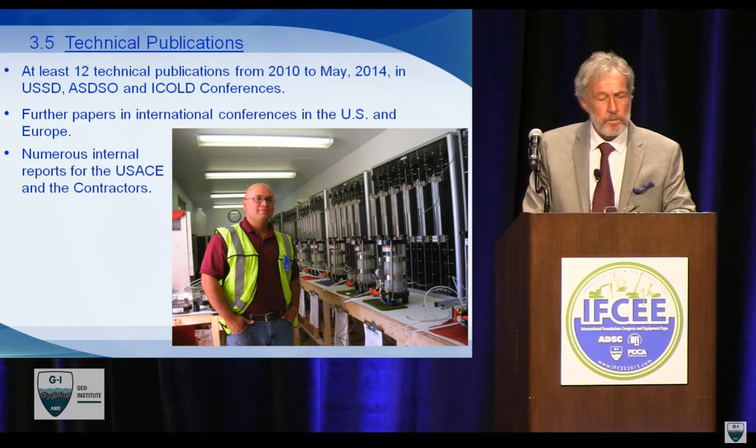It's been published all over the world, Europe, US, and South Africa now as well, I understand. The Corps and the contractors have really put together a lot of very good reports that are available to you.

And codification, sure. The Risk Management Center of the Corps of Engineers, headed by David Paul on an interim basis, is producing an engineering manual on cut-off walls for dams and levees. This will enhance the existing EM, and that's going to be published later this year.

Reclamation, my friend Mark Bliss, is also finalizing a new design standard on cut-off walls to be published later this year. The DFI Slurry Walls Committee, Gianfranco DiCicco, who I believe is here, is developing a similar guideline. Gianfranco's a wee bit further behind on schedule, but that is apparently going to be ready to go next year.

And all of these publications will give new blood for the existing ICOLD Bulletin 150 and the European standard. So you can see the impact that one successful job will have on world practice, provided it is published and codified properly.

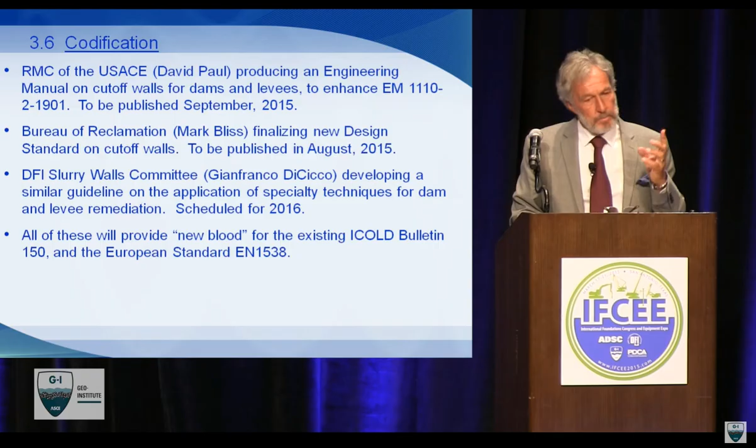And the other interesting thing, and the contractors amongst you know this, is that there's been a lot of jobs done since then. Center Hill Dam is underway with Bauer. East Branch Dam in Pennsylvania is underway with Bencor Lane, and Bolivar Dam in Ohio with Trevi.

And the specifications for these jobs have become more and more prescriptive, because the Corps is now saying, we understand what you're doing, you don't need to tell us anymore. So please, we'd like it done this way, and if you can do it like Wolf Creek for half the price, that's great. So that's a big influence on practice.

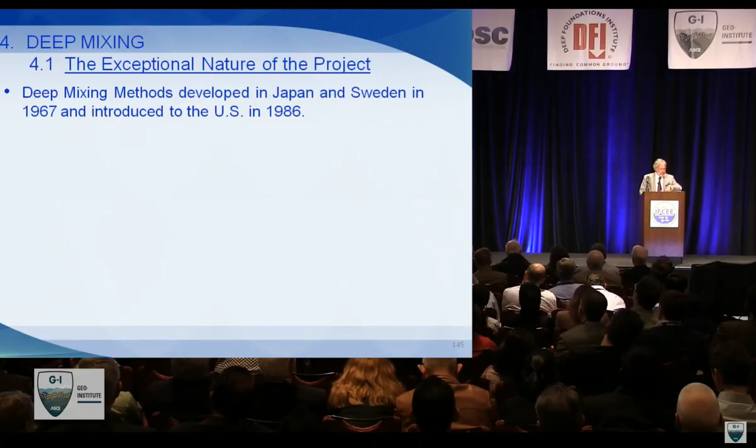Now, when I was putting this talk together originally, I was going to introduce a fourth topic, which was micropiles. And I soon realized that we simply wouldn't have time, and I didn't want to run over. So what I've done here with my third topic, and we are getting pretty close to the end, Alan, is to make this a little bit briefer and a little bit more of a summary. And I'll run through this a little bit more quickly, because I don't want to delay proceedings too much here. The deep mixing methods, many of you know about this from hearing George Filz and the other great specialists talk about this,

So between '86 and 2008, there's a lot of large projects done in the US and Canada using deep mixing. But the market, we always thought, was very erratic in terms of the annual volume. Some years, nothing. Other years, 100 million. A lot of really good contractors in the US from native origins, from Japan, or from the European companies, and always with very keen price competition.

In my experience, acting for the owner, was always that on any one deep mixing job, somebody was way low. Not always the same guy. Usually the same guy, but not always. And so really it kind of tore the backside out of the business to a large extent.

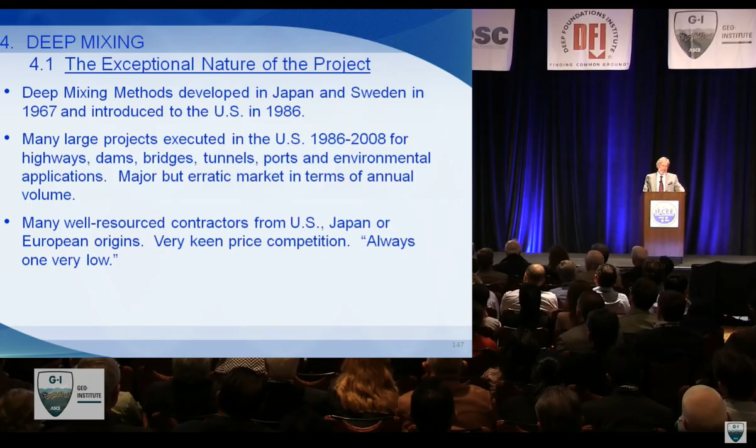Now all these applications until '08 were vertical axis mixing, exactly what you think that deep mixing is all about, the big augers and all the rest of it, but relying on traditional concepts, methods, and monitoring.

Some of the project outcomes were not really satisfactory. A lot of debate, a lot of unhappiness, differences in expectation between what the owner thought he might get in deep mixing and what the contractor thought he was providing. Neither of these jobs that you see here were anything other than completely successful, incidentally. Just to say, that's Raito's project down at Clemson on the left-hand side using their 6-auger machine.

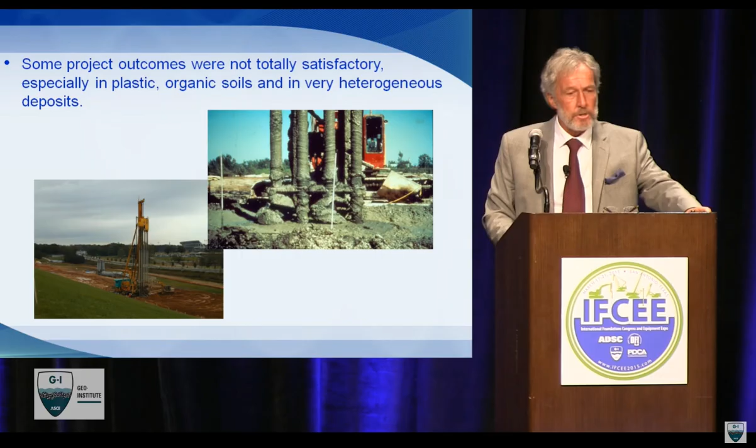Then what happened? We got Hurricane Katrina, Hurricane Rita in the fall of 2005. And all of a sudden, Corps of Engineers went into overdrive, of course, to repair not only what was going on in New Orleans, but some of the other structures that could be affected by hurricanes as well, such as Herbert Hoover Dike.

Now, for those of you who haven't been down there, Herbert Hoover Dike is basically that big hole in the middle of Florida. It's 50 miles in diameter, it's 160 miles around the outside, and on a good day, it's about 12 feet deep. So you can't quite walk across it, but if you had stilts, you could.

The problem is that water gets into it 7 times quicker than it can get out in a hurricane, and as the water rises, it causes distress in the very heterogeneous materials from which the dike is composed. So it became a DSAC 1.

So in New Orleans and in Herbert Hoover, immense challenges. In New Orleans especially, the challenge of time. We could not let New Orleans fail again. So all the projects in place there were up against a tremendous time barrier. And these are huge jobs: 100 rig months, double shifting, millions of cubic yards of deep mixing, the largest job ever conducted outside of Japan at that time.

Herbert Hoover. Your task, Jim, if you choose to do it, is to create 21 miles of cutoff, 90 feet deep, through materials that in any one section vary 20 times, from peat through soil to hard limestone. And, oh, by the way, we want it done in 4 years, please, competitively.

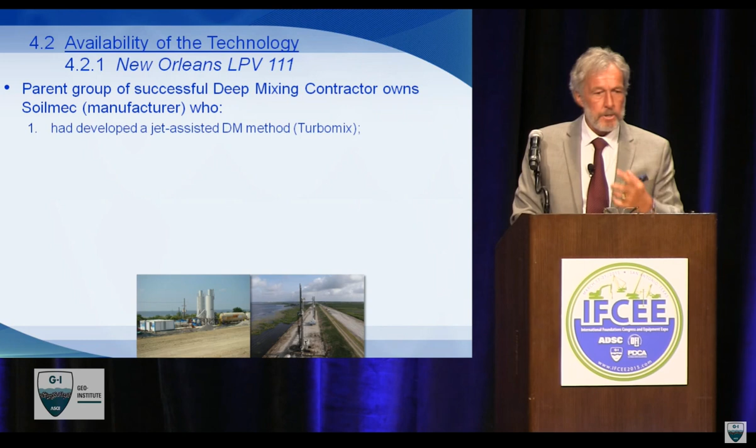So who did we have in New Orleans, first of all? There was a contractor, there was a manufacturer who had experience in deep mixing, who could supply a lot of rigs very quickly, had good links with a Japanese company called Fudo Tetra, could provide 8 different automated mixing and batching plants, because this was fast track, and had advanced mixing, parameter display control and recording systems, telemetrically sending back all the details to mission control.

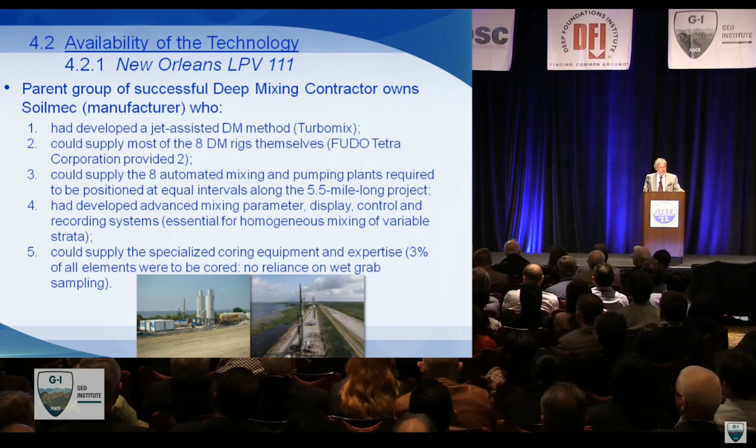It's very difficult to mix the soils in New Orleans, and so together with George Filz and Eddie Templeton and the gentleman from Trevi and Soilmec, there were tremendous advances made in the technology. So this is what we were trying to do there. And when I say we, taking very minor credit, Filz and I were on the internal board for the contractor, trying to keep him honest.

Didn't work. So here's the old levee, which has been degraded, and now the general contractor, Alberici, Archer, Western, and Walsh, preparing the working platform. And here's the boys putting in the deep mix columns.

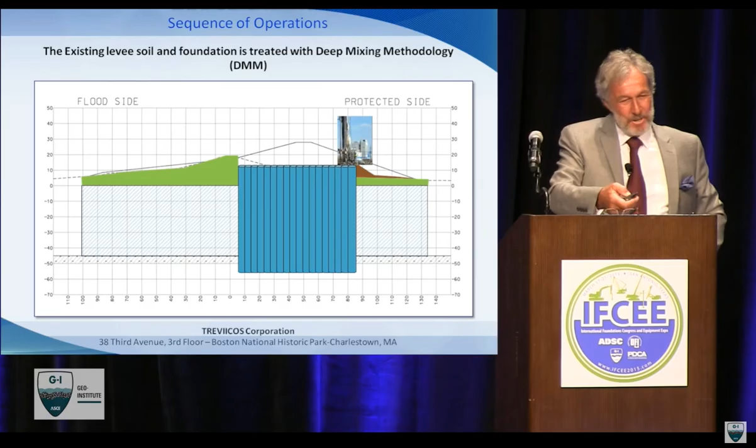Now it always goes like that, doesn't it? Just absolutely painless. So there's the deep mixing in the ground to improve the soil, and some of the soil has the consistency of peanut butter. And so the next stage now is to build a little safety berm there just to protect the work from possible storm surge. Put on the geotextile, and then use the spoil that had been created by the deep mixing.

Now, we couldn't call it spoil. That would have been politically incorrect. It was reworked embankment material, which was then used as the heart of the new levee. It was a wonderful engineering material, just terrific. And then after that, all greened up and all nice grass everywhere. It's amazing what you can do for 350 million these days.

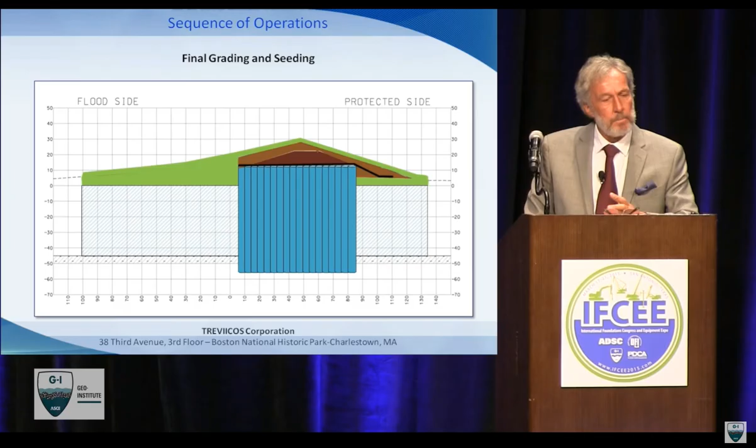So that's basically how LPV 111 was done. And the ground had to be improved because it was such a sensitive environmental area, the Bayou Sauvage and all these other places there, that simply they could not permit the footprint of the levee to expand.

So what about our colleagues at Herbert Hoover Dike? Remember, we've got to build 21 miles of diaphragm wall very quickly. So what did the Corps do? This time it said, okay, industry, you tell us what you can do. And it had a competition, and 3 people were qualified, each with its own different method.

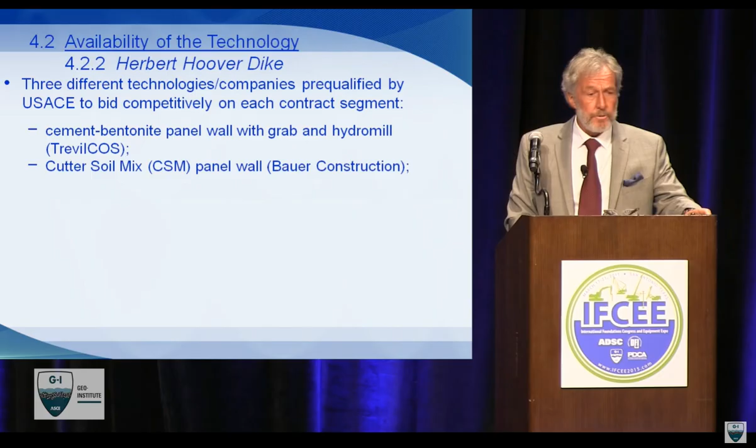So Trevi came in with the cement bentonite panel wall using the grab and the mill. Bauer proposed the cutter soil mix, which is a very interesting technology, basically a combination of diaphragm walling and deep mixing, been around since about 2003. And then, the really interesting one, from our point of view as the panel of consultants, was TRD, trench remixing deep, the continuous wall as offered by Hayward Baker.

And that's really what I'd like to focus on for the next and last 5 minutes here. No disrespect at all to conventional walls or the terrific quality of the CSM that Bauer can provide.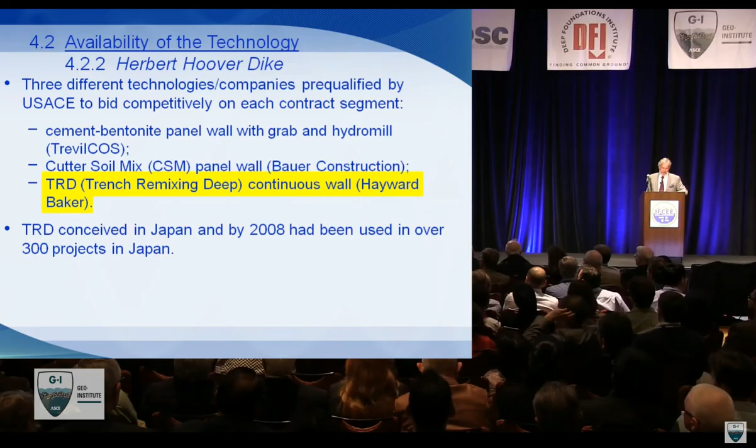So TRD, like all these systems with 3 initials, conceived in Japan. Every Japanese technique has 3 initials. By 2008, it had already been used in over 300 projects in Japan and parts of China. Basically it's a gigantic vertical chainsaw that cuts and mixes and can produce continuous walls up to 170 feet deep and up to 34 inches wide. It is really a spectacular piece of equipment.

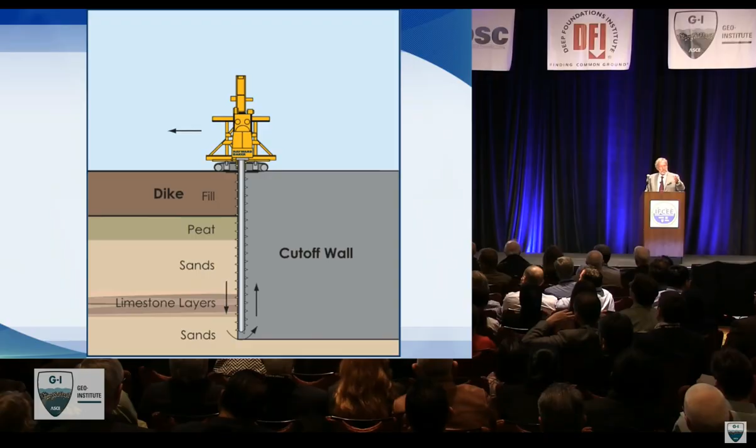This is a little cartoon that shows how it works. The machine moves toward the left, and as it goes, that big chainsaw, called a post, has a big chain running around it, driven under the hood by a big motor. As it goes, it's injecting grout through the bottom of the post, cutting and ripping the material, then reblending it on the upside. So that machine just strolls along, building this beautiful, homogeneous soil bentonite cement wall.

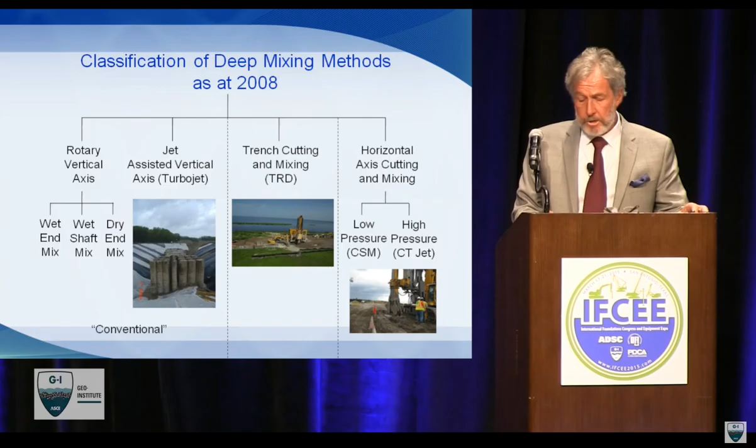I had written a book back in 2000 for the feds on all the deep mixing methods at the time, and basically they were all vertical axis techniques. On the left-hand side there, either conventional low pressure or jet assisted like turbojet, and that was the test columns done for a dam out in Kansas. Then along came TRD, so now we suddenly have a different kind of deep mixing method. And then along came CSM and an equivalent called CT jet, which uses higher pressure. So the world of deep mixing has greatly expanded as a result of these new technologies, which were used with great success at Herbert Hoover.

So what about the risk? What did the Corps think? Well, it went about managing its risk by, as I said before, inviting industry to propose. Out of 8 different methods, 3 were selected, and then each of the successful contractors was bid against each other competitively on different segments of the project. So the Corps got the technology, and they got the competition.

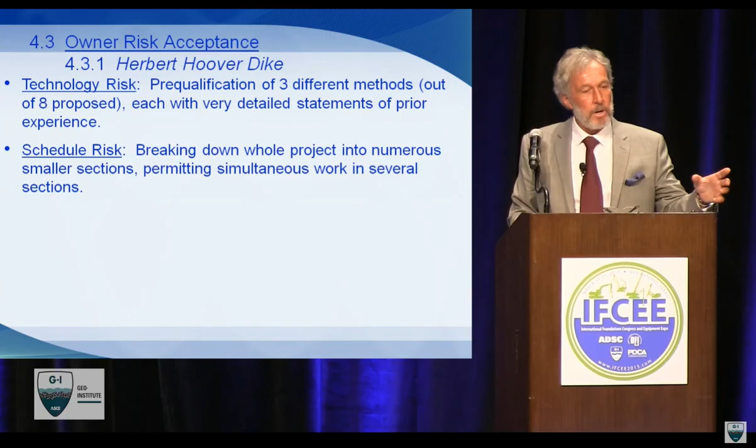They broke down the job into little bits. Well, each bit was still about 3 miles long, right? So it was good work. But then different contractors could work at different parts at the same time. They also had project-specific risk, so very strong verification requirements on the project, including a 500-foot demonstration section on every major contract. So we had a chance to look at the stuff, test it, water test it, make sure it was cool before it was then used.

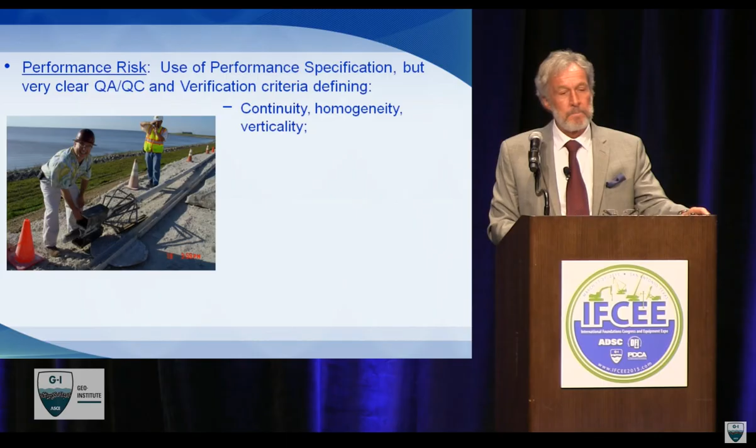As you can tell, this very happy gentleman here on the left works for the contractor. He's just taken another good sample. Although it was a performance specification, the documents were crystal clear when it came to what the goals of the project were: continuity, homogeneity, and verticality. What the width could be. What the in situ permeability could be, measured in situ, not on samples in the lab, where all your testing is samples that you've taken in the field. This is in situ permeability monitoring. Satisfaction of a strength requirement, and satisfaction of chemical compatibility with groundwater and soil.

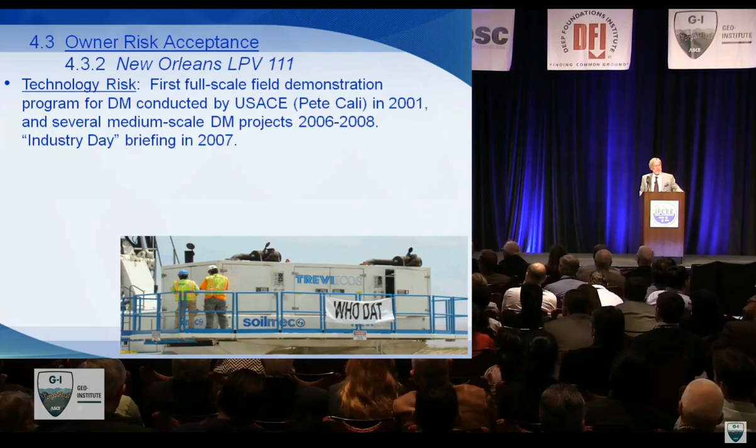So what about risk acceptance in New Orleans? Those of you who have been down there have heard 'who dat' once or twice before. Each of these big machines was named after something from New Orleans, most of which were very rude. We, in fact, had done a demonstration project with the Corps, Dr. Pete Cali, in 2001. But our results were shelved because deep mixing was far too expensive and it was far too new for the old boy network in New Orleans. And so Rita and Katrina changed that.

So the Corps then briefed industry in 2007. Everybody came, was told about the work. And then when this job was bid in 2008, we used early contractor involvement. So the project was actually bid with only 10% completion of the plans and specs, and it was awarded at 35% plans and specs. So as the contractor was mobilizing, the rest of the specifications were being created and agreed as part of this early contractor involvement. What a terrific way to manage schedule.

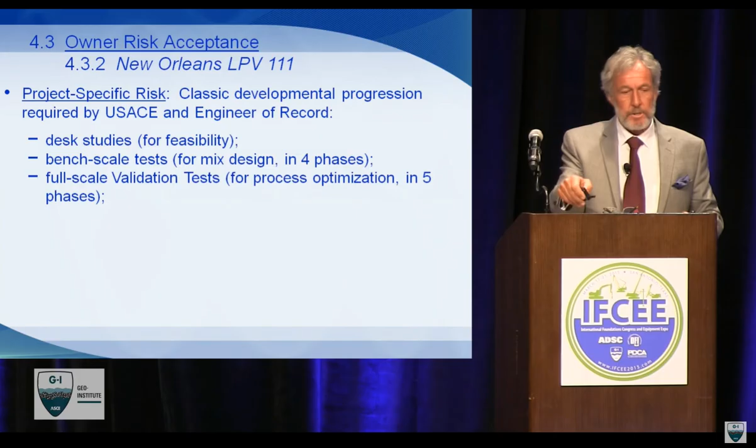So, desk studies - this is classic deep mixing 101, as you know. Bench scale tests, full scale validation tests in the field, intense monitoring of the production works. That's the project specific risk, and the performance risk, performance specification, very clear QA/QC.

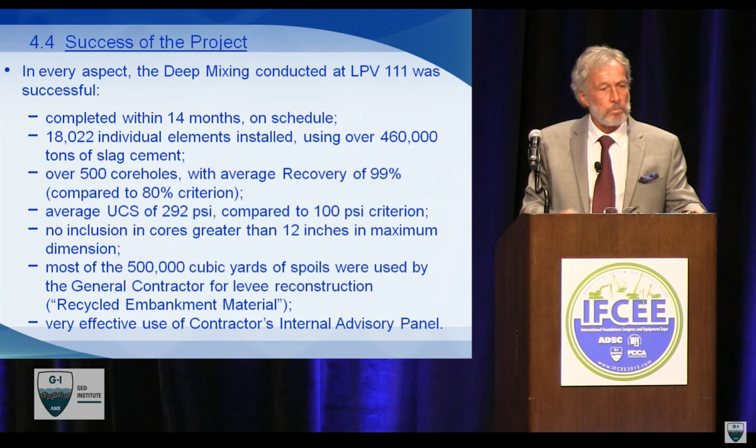All 3 contractors were finished in early 2012. We learned a lot on the way, especially about heat of hydration and about pressure filtration of the grout and so on. But every single inch of the 21.3 miles was accepted by the Corps.

Have we published? You bet. Those of you who were with us in New Orleans in 2012 had the infinite satisfaction, of course, and delight of sitting through a whole session on LPV 111 with 6 papers. And there were 6 TRD papers presented at the same conference, and lots of papers on CSM as well.

We're still getting papers on these techniques at the ASDSO and USSD conferences, and it's been published all over Europe and in the ISSMGE bulletin as well. It's got a chapter in our textbook devoted to dam and levee remediation. So it ticks all the boxes.

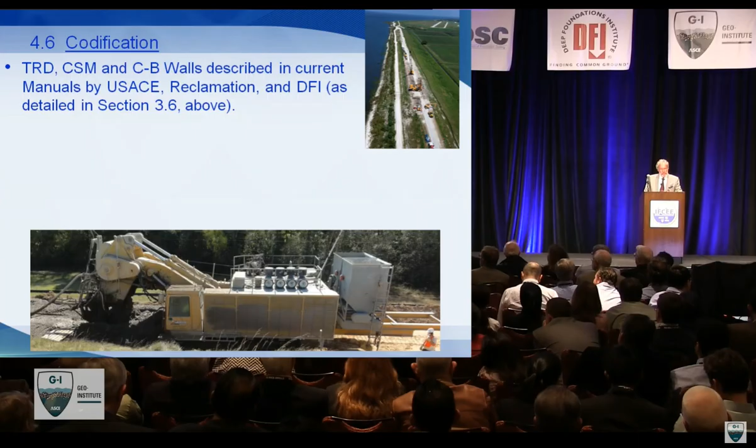Now, the other thing is codification, and we're very close to wrapping up here - all these techniques are described in the current manuals by the Corps, Reclamation, and DFI, as we mentioned before. So all the existing contractors have their ideas in codification.

And now it's permitted other companies, such as De Wind here, with their own trencher, to come in and start doing similar work. So not only is it codifying to protect the quality, it's also encouraging competition to have similar systems, and that's a great thing.

And a lot of these lessons are incorporated in the 2013 manual headed by Mary Ellen Bruce and her colleagues, George Filz and so on. So here we have one pass trenching now developed by other people.

Okay, so I really appreciate your patience. We're almost there, and I'm just going to pull this together with a couple of last slides now.

And here's the great leap here. It comprised a group of major developments and processes: materials, technology platforms, design complex. It was implemented under the vision of one contractor-consultant team in response to a major market need. It ticks the boxes. It was a great leap.

The concrete cutoffs - my thesis says that the Great Leap had 3 steps. The initial acceptance, first of all, that you could actually build a diaphragm wall through an existing dam with minimal dam safety risk - Wolf Creek 1.

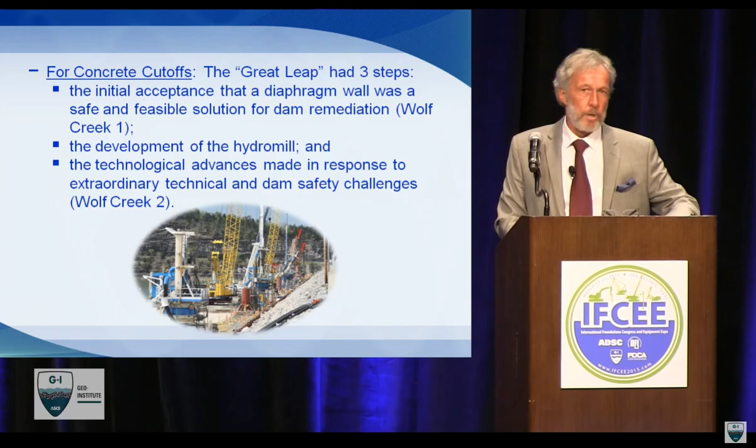What we're doing now at East Branch, what we're doing at Center Hill and so on, is almost taken for granted by some people in terms of the quality and the way in which this work is now being done. But maybe that's the way it should be, till somebody else comes along with the next great leap.

For deep mixing, in my opinion, the great leap of 2008 inflicted by the Corps of Engineers was the implementation of a newly imported technology, i.e. TRD, and major enhancements to a traditional technology.

The Trevi Turbo Mix - so there you go. That's my feeling for the great leaps. Finally, I would say that each great leap was engineered to satisfy the demands of a specific project. There's no question that these would not have happened had the Corps or other private clients not come to the contractors and manufacturers and said, you have got to fulfill a very rigorous set of requirements. And the leap would not have happened if the demand had not been there.

It's all been published, and there is no secrecy. So just to wrap up, this is where I'm going to go back to my notes for a second.

You probably all know about Karl Terzaghi, and this image is taken from the seminal textbook Foundation Engineering by Peck, Hanson, and Thornburn in 1974. Karl Terzaghi served the Austro-Hungarian Empire. He was an engineering officer in Serbia during the First World War. And on November the 1st, 1915, 100 years ago, he wrote, 'War and technology, like fire, are stimulating in their primitive stages, but they degenerate in their eventual achievements.'

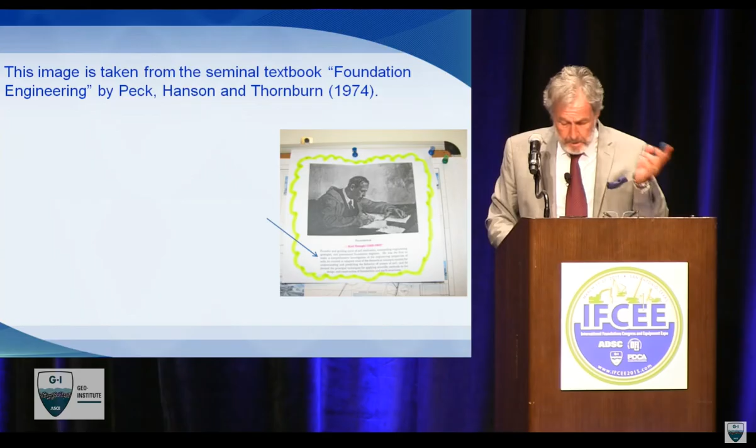The frontispiece of the seminal textbook Foundation Engineering by Peck, Hanson and Thornburn provides the iconic image, the mature, slightly mysterious Professor Terzaghi hard at work. And the caption underneath this photograph is quoted here: Terzaghi, 1883 to 1963. He was a young man when we lost him. The founder and guiding spirit of soil mechanics, outstanding engineering geologist, preeminent foundation engineer.

Now, I know you can all read, but this is for the benefit of the cameras because I think it's important that this is memorialized. He was the first to make a comprehensive investigation of the engineering properties of soils. He created or adapted most of the theoretical concepts needed for understanding and predicting the behavior of masses of soil. And he devised the principal techniques for applying scientific methods to the design and construction of foundations and earth structures.

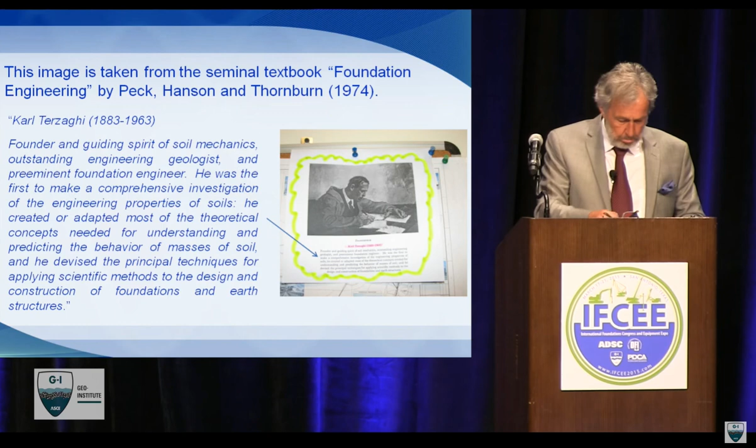Now, that image was not taken by my personal assistant, Mrs. Metz, who is with us today, from the textbook, but was sent at my request by a gentleman called Rick Robertson, CH2M Hill International in Panama. Rick is the leader of the locks dispute team for the third locks project, and there's a photograph that I took recently. I do a wee bit of work for Rick on some of the things he's doing, so he sent it to me with the cover. He's got that photograph tacked up on the wall of the office where we have all the meetings.

And it says, pinned up, watching over us in our day-to-day activities and reminding us of the observational method, bringing a smile to my face. You have a colleague, a professional engineer up to his neck in alligators in Panama, and that is his guiding light that he sees every morning when he comes down for his Panamanian coffee.

So, for me, the real legacy of Karl Terzaghi: an educator, but even more, an inspiration. A scientist, but equally a communicator - unusual in our field, eh? A genius, but in reality, the ultimate role model for all of us, despite, or perhaps because of, a well-documented love of wine, women, and song. So as I say, no one is perfect.